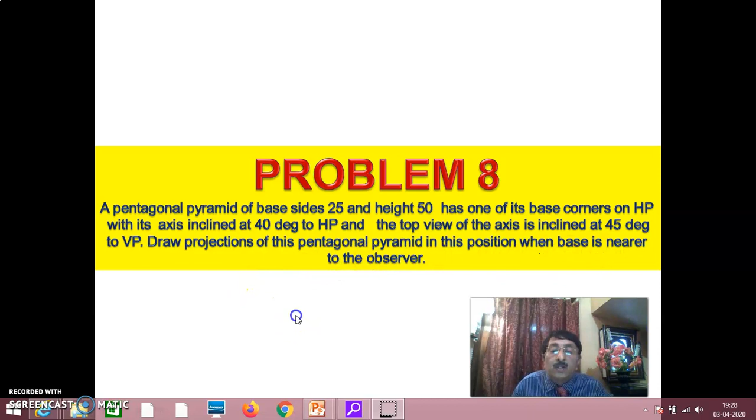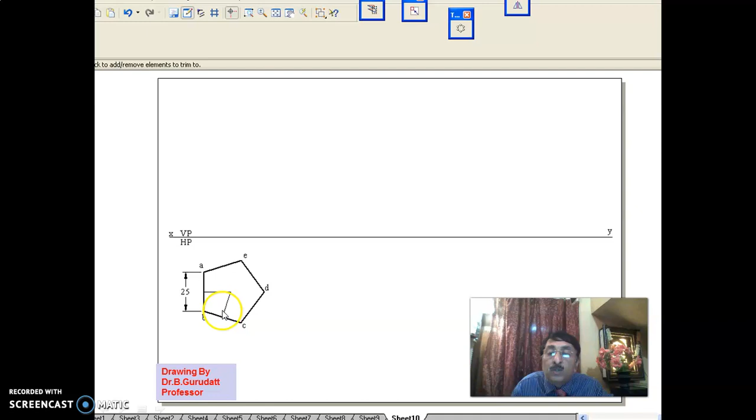Draw pentagon ABCDE with its 5 edges. Once the pentagonal base is drawn, locate the apex by drawing perpendicular bisectors from any two sides; their intersection gives the apex point, the axis point O, O1. Now join OA, OB, OC, OD, OE, giving you 10 edges in total. Remember, a pentagonal pyramid always has 10 edges, and you have to manage these 10 edges throughout.

When this pentagonal pyramid is rotated with respect to HP and VP, for an observer looking from the top and front directions, some edges will be visible and some invisible. You have to take care of all these steps.

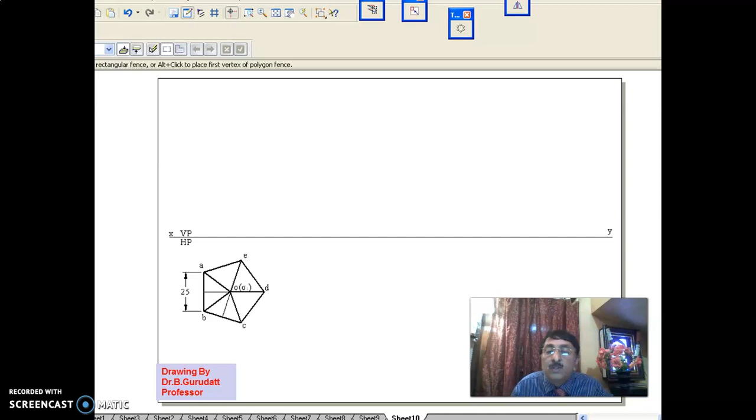Now the pentagonal pyramid's top view is over. Take the height as 50, join the outer boundary, and observe here: this is A, B, C, D, E as I have written, and this is O bracket O1, which is the axis.

Since B is nearer, it's B dash bracket A dash. Since C is nearer, it's C dash bracket E dash. This D is here, this is D dash, and O dash, O dash is the axis.

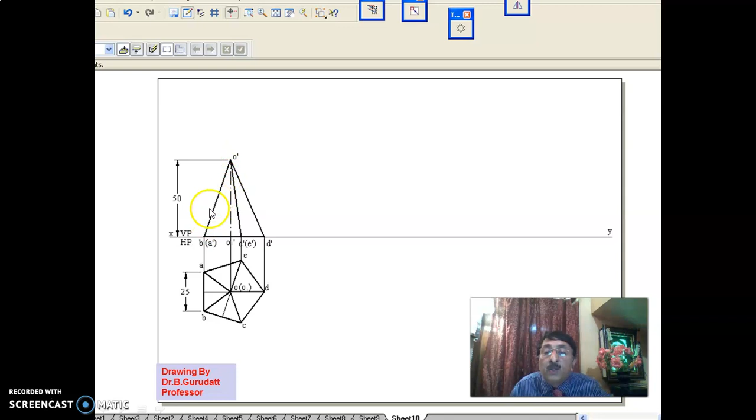Now count the number of edges. Since it is the base, there are 5 edges here, plus 2 edges here with 2 slant edges overlapping, OB and OA, plus 2 more slant edges overlapping here, and plus 1 slant edge here. So 5, 2, 2 and 1 totals 10 edges.

We must know that tilting left gives edge on HP, and tilting right gives corner on HP. Here I have tilted right so that it is corner on HP, as the problem requires, with the axis inclined at 40 degrees to HP.

In the solid edge method, you move, copy and rotate so that the axis is inclined at 40 degrees, or the base is inclined at 50 degrees, to HP. Now in this position you have to draw the top view, looking from here.

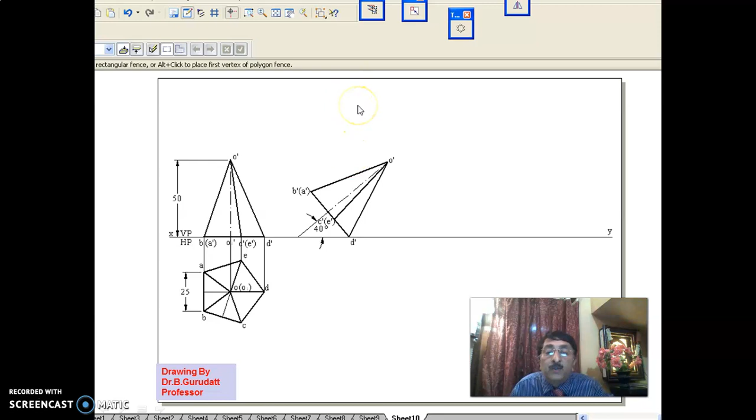Step 1 says obtain all the points and join the outer boundary. I have got all the points here: A here, B here, C and D on these lines, C here, E line, and D here, O here. In that way I have drawn the outer boundary.

Since the apex is nearer than the base, the remaining edges of the base should be dotted, so I immediately make ED and DC dotted. Now count the number of edges: 5 plus 2 gives 7 edges done, leaving only 3 edges, OA, OB and OD.

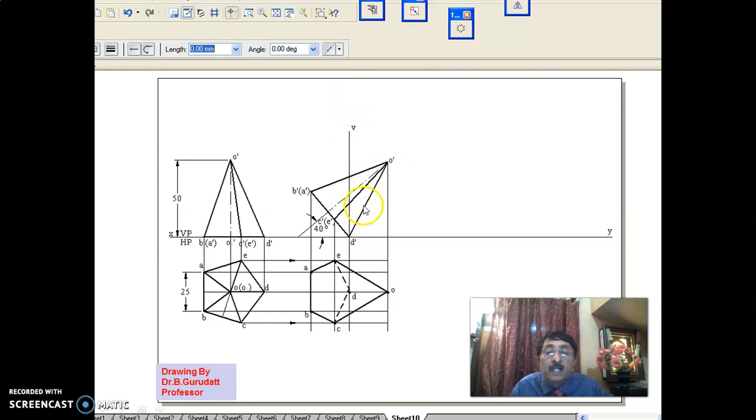Looking from the top, OB and OA, these two slant edges, are nearer to the observer, so they can be seen in the top view. OD, being the far away edge, is blocked by the solid and cannot be seen by the observer, hence OD is made dotted. OA and OB, being near edges, are darkened, while OD, being far, is made dotted.

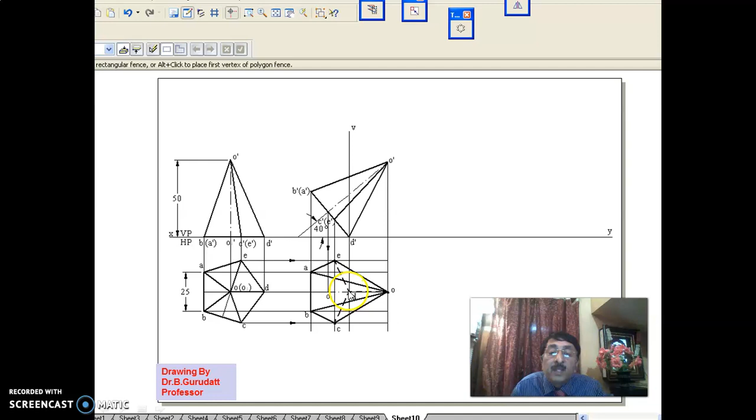Show the axis. As you know, the axis is not an edge, it is just an axis of symmetry, so you show it only between D and O1, changing the line type to the long-dash-dot line used for axes. O to D is an invisible edge, while D to O1 is the axis representation. Actually, the axis is between O and O1.

Now the problem states that the top view of the axis is inclined at 45 degrees to VP. So again, as usual, you move, copy and rotate it such that the axis O1 is inclined at 45 degrees to VP.

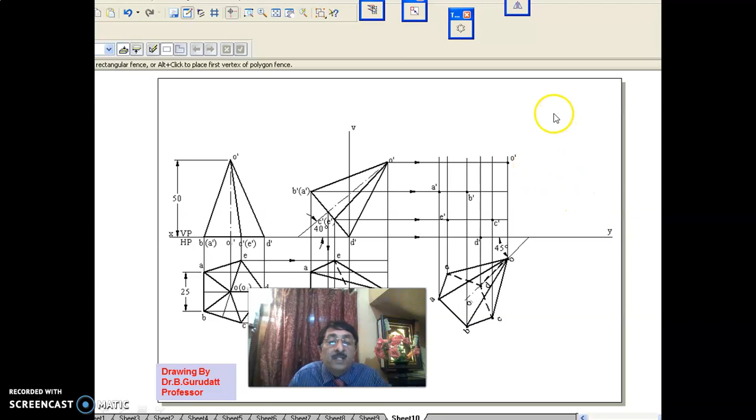Now, as usual, take all the points to the other view and you are expected to write the front view here. First step is to join the outer boundary of these points. Once you join the outer boundary of these points, step 1 is completed.

In step 2, compare apex with the base. If you observe here, the base is nearer than the apex. For an observer looking from the front direction, the base can be seen. Hence, I'll darken the base.

Now count the number of edges, 5 plus 2, 7 edges over. And 3 more edges are there: one is OB, one is OE, one is OD.

If OB, if B is the nearer corner edge, O dash B dash should be darkened in the view. And O dash E dash and O dash D dash are the back corner edges. As a result, they cannot be seen. Hence, we will make them dotted.

And finally, take the projector from O1, projector from O1, and show the axis.

That completes problem 8. Now coming to problem 9. Problem 9, initially, is the same as problem 8. You start in the same way. Pentagonal pyramid you write, using perpendicular bisector and all that, getting O1 and so on.

A, B, C, D, E, 5 edges. OA, OB, OC, OD, OE, another 5, making 10 edges. Get the front view. This is 50 mm. In that way, there are 5 edges, 2 edges here, 2 slant edges merging one against the other, 2 edges here, and 1 slant edge, totaling 10 edges: 5, 2 slant edges, 2 slant edges, 1 slant edge, 1 slant edge, 10 edges.

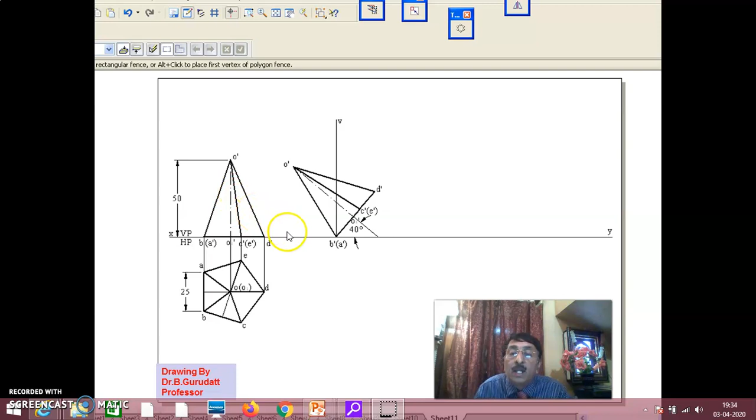Now if you see here, in the previous problem I tilted right such that it was corner on HP. Now I am tilting left so that the edge is on HP.

Edge B dash A dash is on HP. And I have moved, copied, and rotated in such a way that the axis is inclined at 40 degrees to HP. Once it is at this 40 degrees, when you are looking from the top, how it appears in the top view has to be drawn.

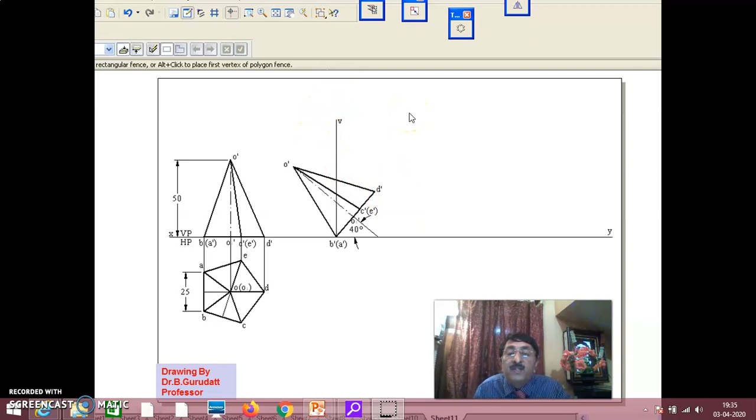Now, what you do is get all the points and, as usual, join the outer boundary of these points. Now, as you know very well, the apex was nearer than the base. They have enlarged the view here.

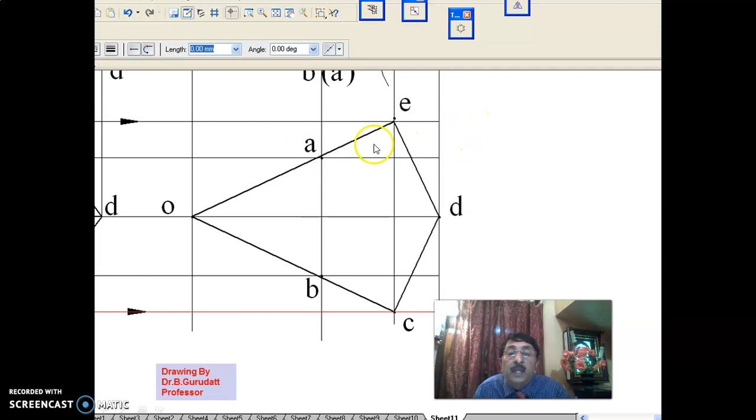Remaining edges of the base should be dotted. That means E to A to B and B to C should be dotted. Now, if you observe here, E to A to B, B to C should be invisible.

Now we are left with 3 more edges. And if you see, OD will be the nearer edge, which will be darkened. OA and OB will be faraway edges. Hence, they will be made dotted.

Now you see here, OD is the nearer edge, you darken it. And OA and OB, these 2 slant edges, when you are looking from here, cannot be seen. OB and OA will be made dotted.

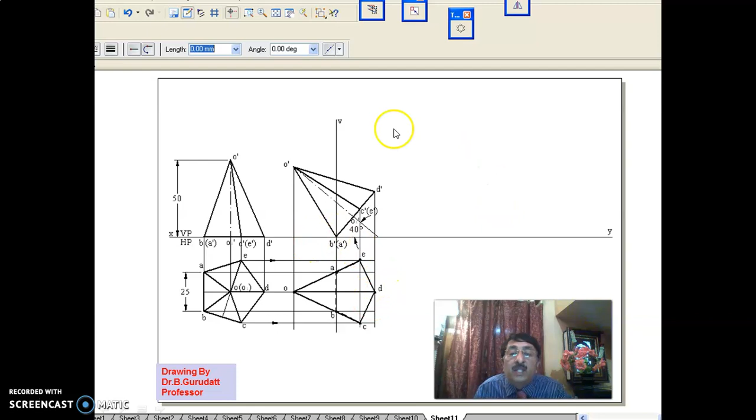Since it is all very close, you can zoom into the area and see whether it is okay or not. Okay, I have seen, you see here, I have zoomed the area, OA and OB, I have made them dotted. They are the invisible edges.

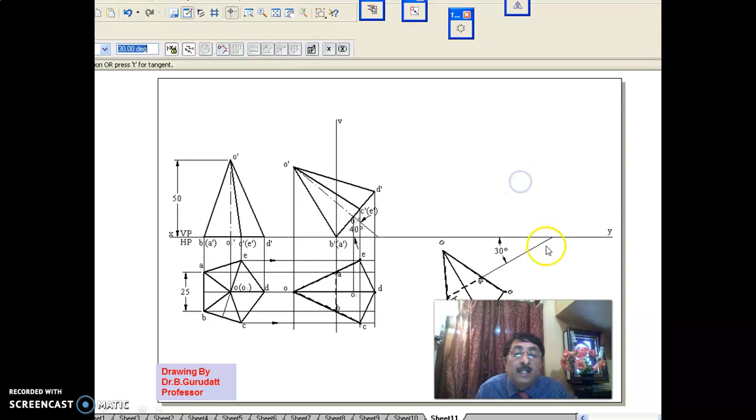Now the question says the edge on HP, the edge on HP is AB, should be inclined at 30 degrees to VP. That is why I will move, copy, and rotate in such a way that the edge on HP is inclined at 30 degrees to VP. In this position, you have to get the front view.

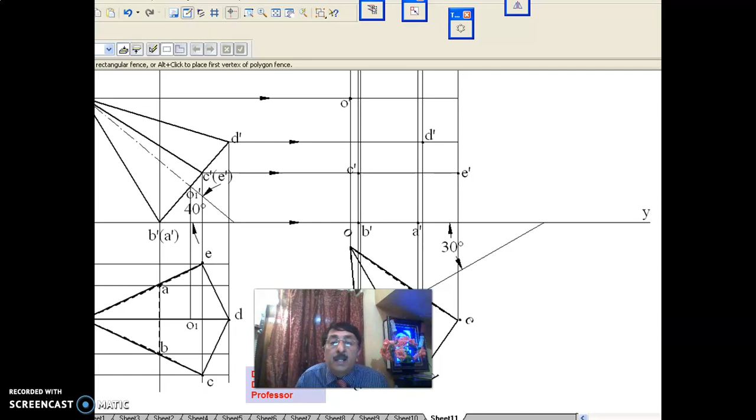Now, even here, you have to be very close. You should know what exactly is happening here. You are looking from here. You should know step number 1 anyway is the outer boundary. Once you draw the outer boundary, since base is nearer, you have to darken the base. You enlarge the area, carefully you do it. It has been deliberately planned so that you should not get confused here.

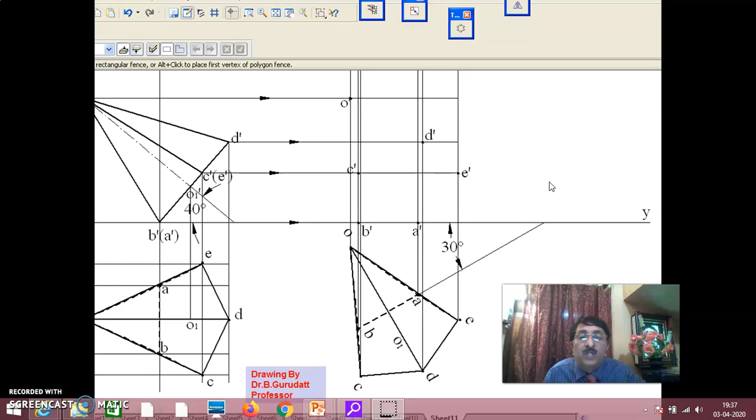Now the first step is do the outer boundary. It is O dash to D dash, D dash to E dash, E dash to A dash, A dash to B dash, and B dash to O dash is the outer boundary. Since base is nearer, darken the base.

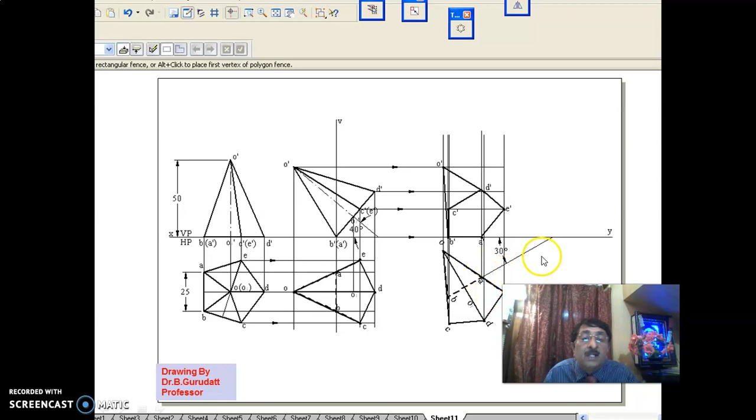Once you darken the base, you are left with only three edges: O dash C dash, O dash E dash, and O dash A dash. O dash C dash, since C is nearer, you darken O dash C dash. And O dash E dash and O dash A dash are faraway edges, as a result cannot be seen by the observer. Here, O dash C dash has been darkened, and O dash E dash and O dash A dash are the back edges when you are looking from here.

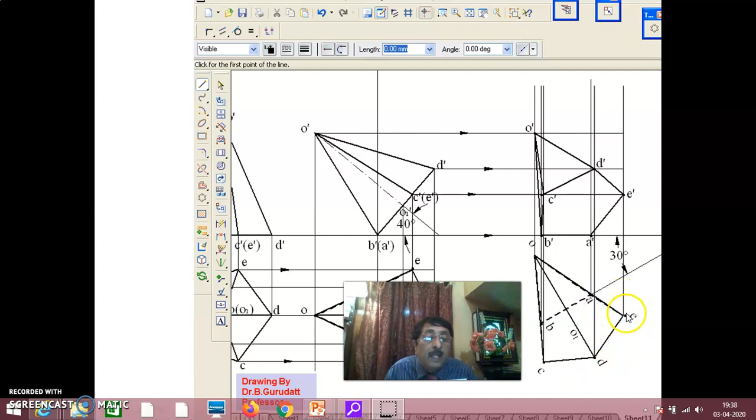There is O dash E dash, and O dash E dash A dash. When you are looking from here, this E and A back edges cannot be seen by the observer, hence you make it dark dotted. And finally show the axis. In that way, this problem gets completed.

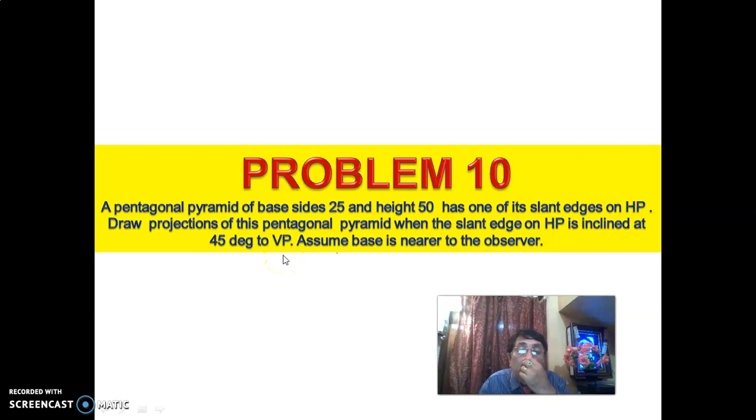Now problem 10 says, a pentagonal pyramid of base sides 25 and height 50 has one of its slant edges on HP. Draw the projections of this pentagonal pyramid when the slant edge on HP is inclined at 45 degrees to VP. Assume base is nearer to the observer.

Now, draw the pentagonal pyramid in the usual way. Draw the top view, draw the front view. I have told you what exactly is the procedure, you do it. Now, if you see here, tilting completely right will be O dash D dash on XY line. That means slant edge on HP. Tilting completely left, it will be triangular surface on HP.

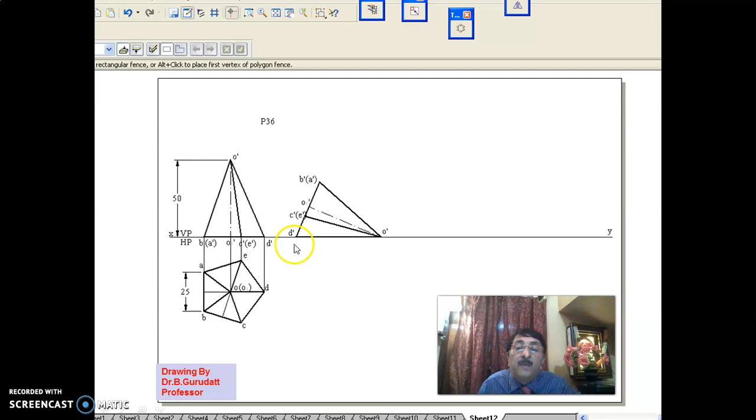Now what you want is, in problem 10, slant edge on HP. That is why I completely tilt right. Now if I completely tilt right, slant edge will be on HP. Once it is in this way, I have to write the top view, take all the points to the other view, join the outer boundary of these points.

When you are looking from the top, base is exposed, that is, base is nearer than the apex. Since base is exposed when the observer is looking from here, complete base you can see. That's why darken the base.

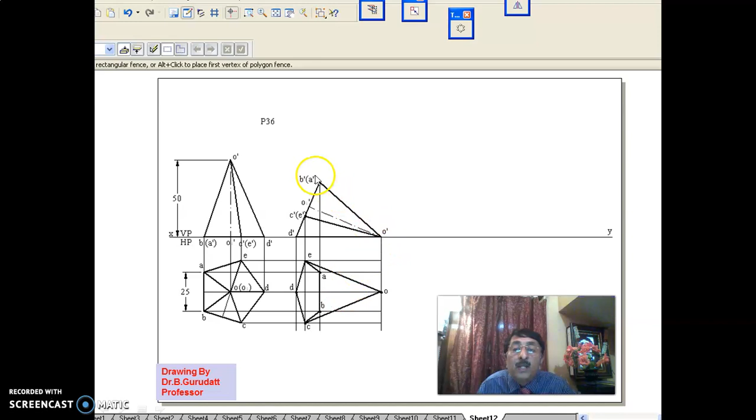Now in that way, if you count the number of edges after the second step, 5 plus 2, 7 over. Then you are left with OA, OB and OD. OA and OB, when you are looking from here, OA and OB are nearer, darken it. And OD is a far away edge, make it dark dotted, because it is the slant edge on which it is resting.

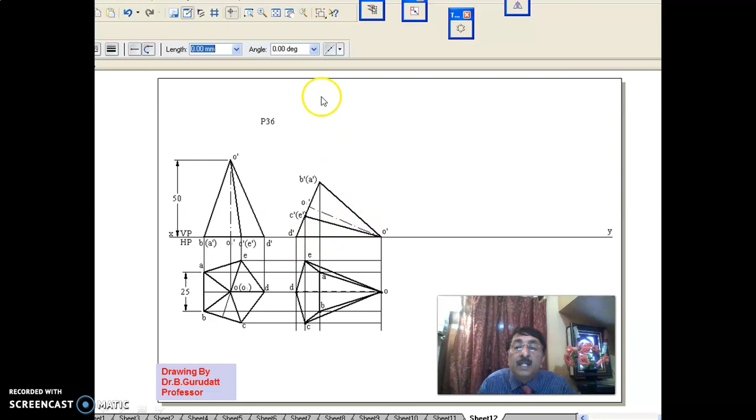Obviously, an observer who is looking from the top to get the top view, when it is resting on OD itself, he cannot see the edge on which it is resting. Hence, O to D will be invisible. And show the axis, between O and O1. Don't prefer axis over slant edge, that is an invisible edge. O to D dark dotted only you see. This axis is merged with this invisible edge OD.

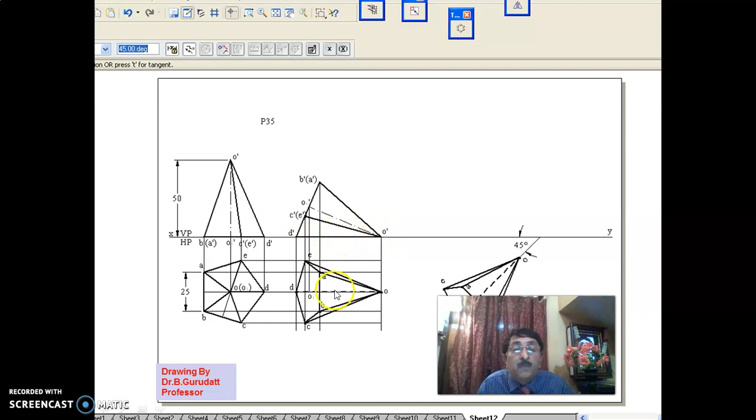Now, what exactly is happening here is, the top view of the axis is inclined at 45 degrees to VP, or you can even say this edge on HP is inclined at 45 degrees to VP, because edge on HP is O dash D dash, that is OD. Since it is on HP, OD is in true length, that is why edge on HP is slant edge. If that slant edge is inclined at 45 degrees to VP, it is same as telling top view of the axis inclined at 45 degrees, because the axis is not in true length, but slant edge OD is in true length. That is why slant edge on HP inclined at 45 degrees to VP means you do it this way.

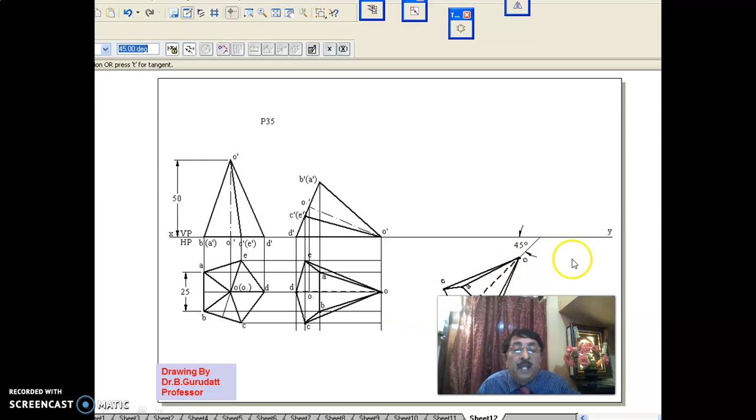To get the front view, take the projectors to the front, join the outer boundary. Since base is nearer, darken the base, and OC is nearer, darken OC, and O dash A dash and O dash E dash are far away edges, make it dark dotted, and finally show the axis. In that way, you are completing problem number 35. Thanks for watching.